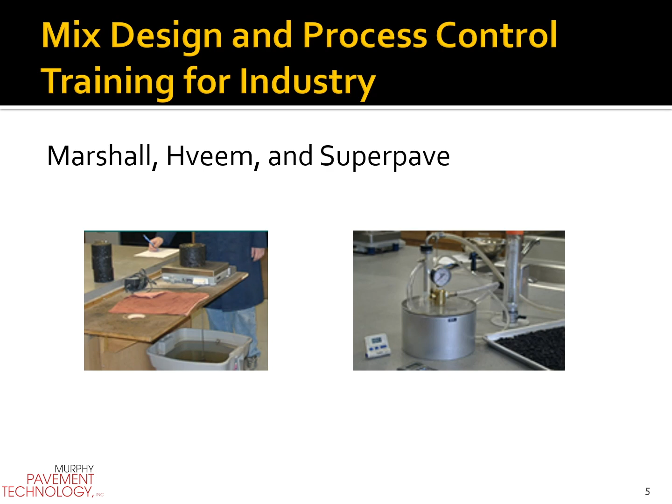Many different asphalt mix design and process control efforts exist, varying across the nation. However, we need to make sure we follow the practice that exists in the state you're working in, and the best resource available is the Asphalt Institute's Asphalt Mix Design Methods, known as Manual Series number 2.

So if you want the full book, reach out to the Asphalt Institute, or just make sure you hire a producer who uses MS2 as their design guide.

A lot of different products go into asphalt. It's a big world we live in, so we need to choose and select products that will perform for this application. In many cases it's similar to roadways and runways, however specific to impurities and things like that, it's different.

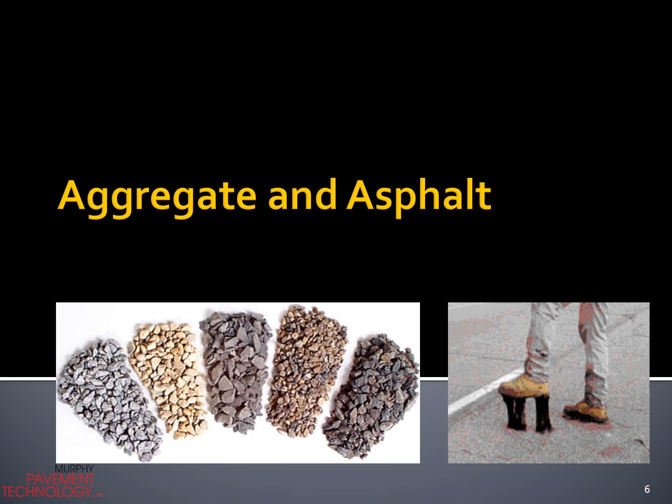Crushed particles are good for nearly every asphalt installation, and athletic is no different. Proper liquid asphalt is equally important - we need it to be soft and pliable, but tough with tenacity as well. Importantly, we need to produce good mixture properties and do quality construction of the density in place. We'll talk about those throughout.

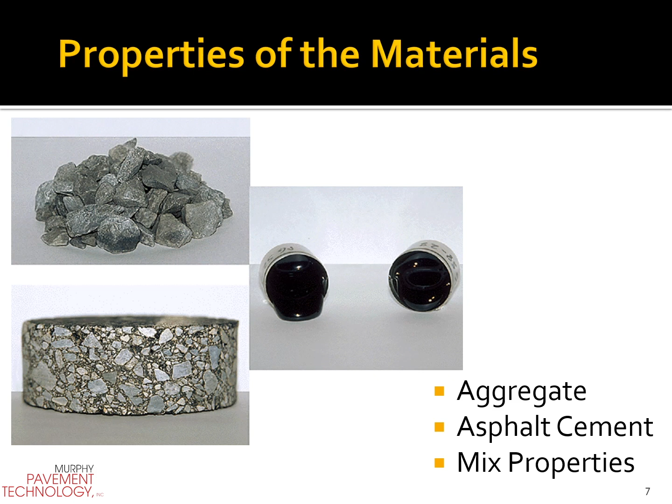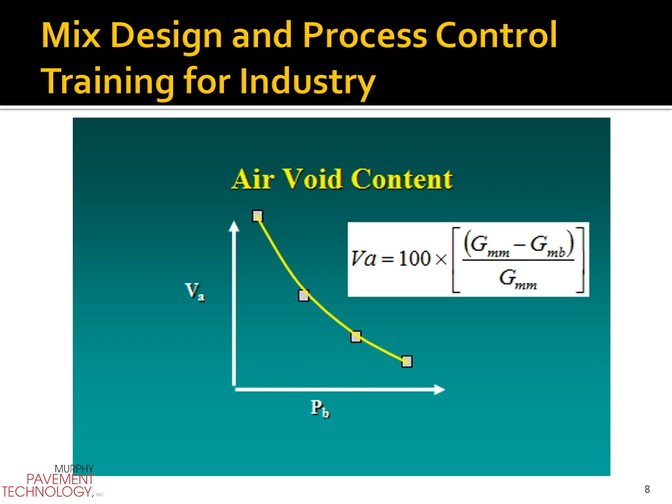A fairly standard and important item to be aware of is the proper selection of air voids. For our work in athletic, we're always going to choose air voids in the laboratory between 3 and 3.5% air voids. We don't want to be higher and we don't want to be lower - that should be our target air voids, plus or minus.

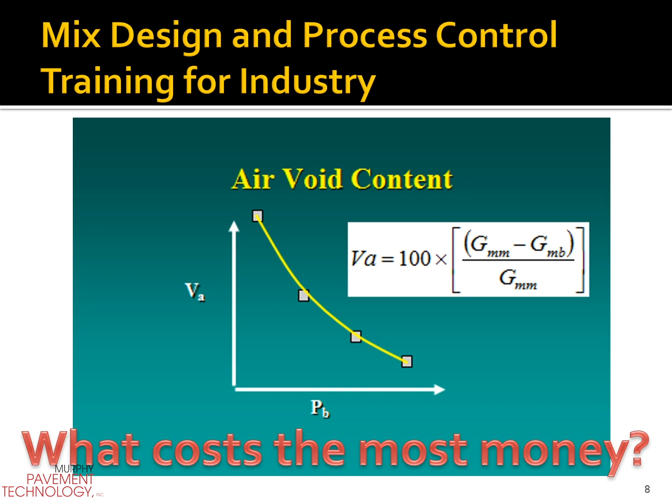The plus or minus will be very tiny, and dropping air voids to a lower level will cost money because it requires a little more asphalt cement. But that's okay, because for our application we need higher density and a mixture that'll perform better.

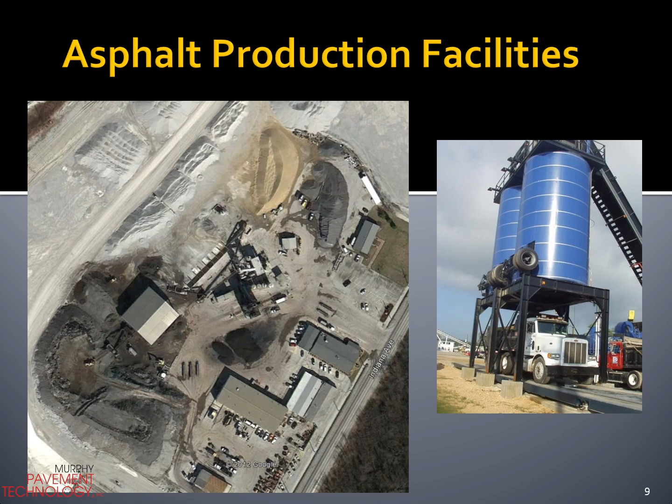There are lots of asphalt facilities around the nation. I recommend you reach out to producers who are National Asphalt Pavement Association members, or members of local asphalt pavement associations or the Associated General Contractors in the states or provinces around North America. They do a really good job educating suppliers so they produce the highest quality product possible.

So most should probably compact between 94 and 95% theoretical for athletic applications, not only on the mat, but on the joints as well.

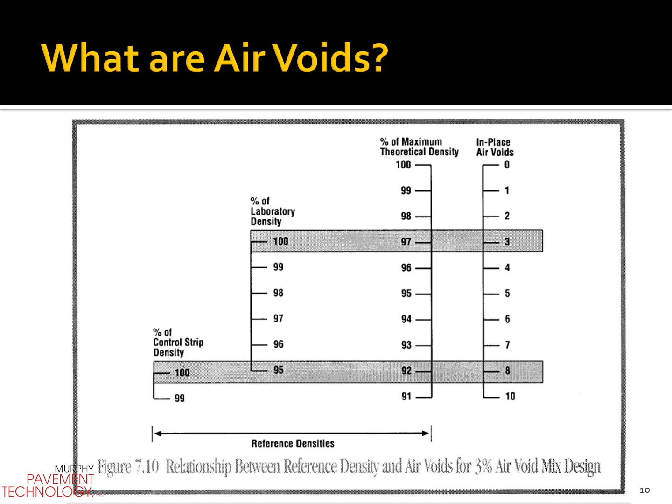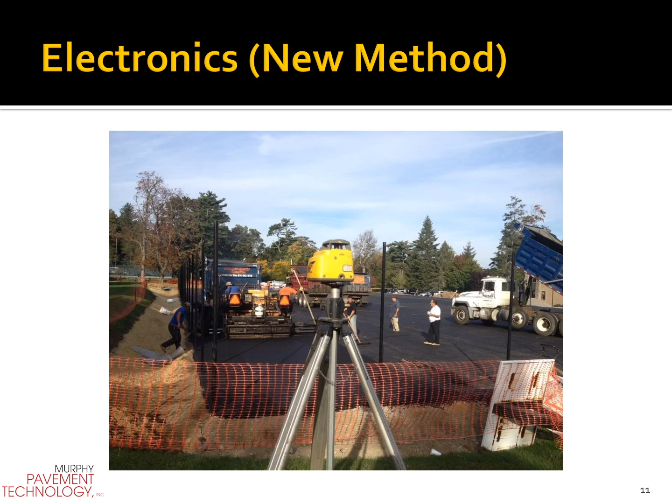For installation, we have lots of GPS systems available that can control our elevation and cross slope. Excellent pieces of equipment - these should be used.

You'll be checking the elevation as you go along. Again, very important for planarity, and very important for building to the proper grade and cross slope.

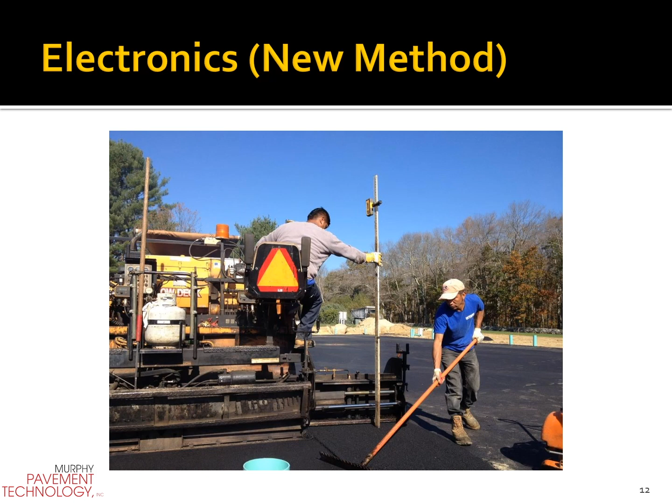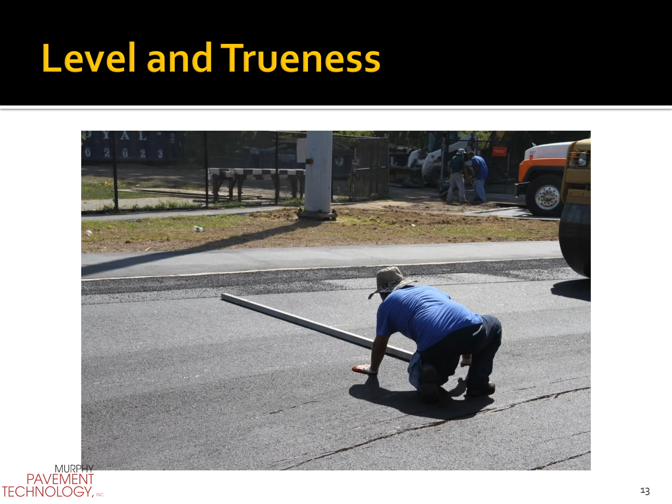Then there's going to be hand and foot inspection, checking for levelness and trueness after the rollers are on the mat. You have to do that across the mat as well as between the joints you're paving.

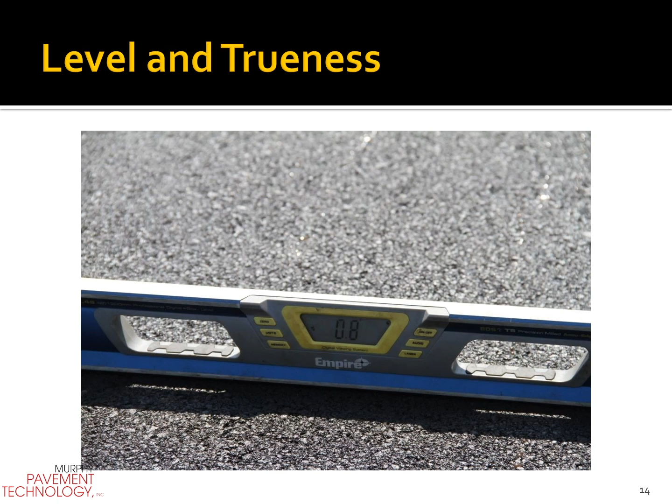It's just the worker's tool. They're targeting 1% cross slope - this one here looks like 0.8, so they're relatively close. They really want to pay attention because they have to make the water run off the court or the running track.

A real important item: when you're an installer of asphalt, make sure the architect has given you an adequate minimum lift thickness to do your job. That means you can get better planarity and better density, but in no certain circumstances should you place less than 3 times the maximum aggregate size.

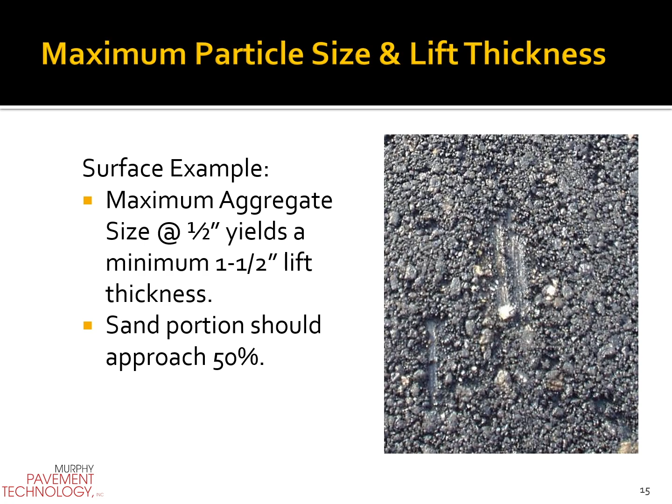Certainly the specification should be at least 3 times maximum aggregate size. Anything less is going to cause us to crush aggregate particles, which will lead to premature failures. And the sand proportion of your mixtures should be what we call fine graded, so they probably should approach about 50% of the mixture.

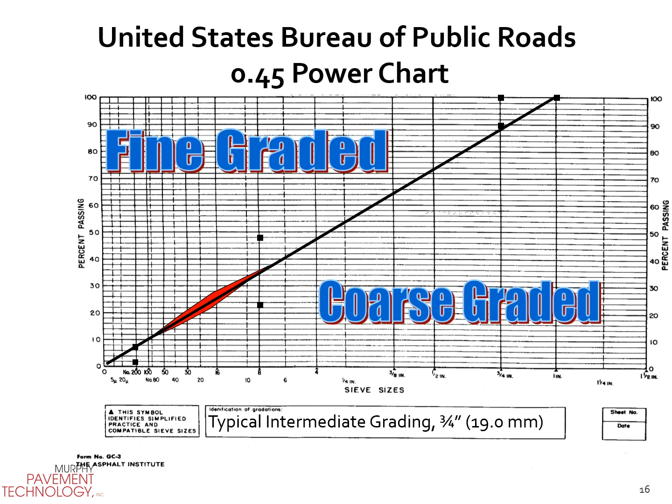We have different types of asphalt all over the nation in North America. Some are called fine graded, others are called coarse graded. I'm going to recommend that you look at fine graded mixtures in the area that you work because they're going to be the most conducive to the athletic asphalt requirements and guidelines provided by the American Sports Builders Association, and they really will lead us to a very exceptional finished product.

This is a lower course mixture. It would apply equally as important, if not more important, to the surface course mixture, or as you might call it, the top coat.

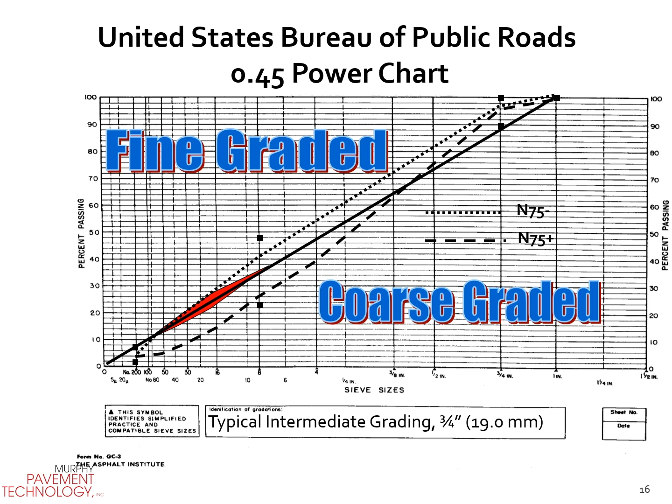Mixture properties will also guide the ability to get density. Again, a finer graded mix with a little more oil will probably compact much quicker and to the higher levels that we're looking for in athletic asphalt. So again, that's going to be a great reason why we should specify fine graded mixtures.

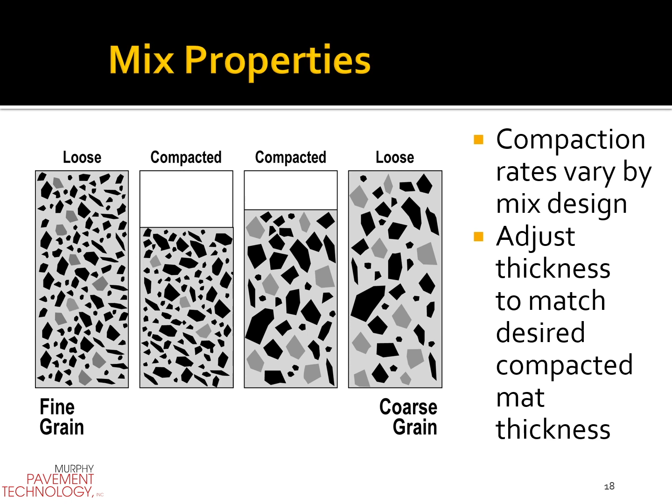That's just a picture showing different maximum particle sizes, to one more time remind you that asphalt producers have many different mixtures available. You just need to make sure that you get the proper mixture for the day of construction.

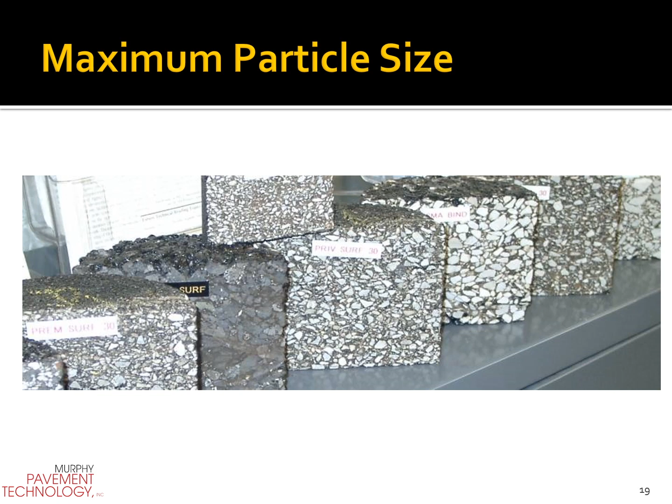I've developed nationwide guidelines and specifications for people to use in general. They just come down to fine graded, slightly higher asphalt content, and a higher compaction requirement that's required for, as we call, density. It's athletic as well as my commercial and industrial specification.

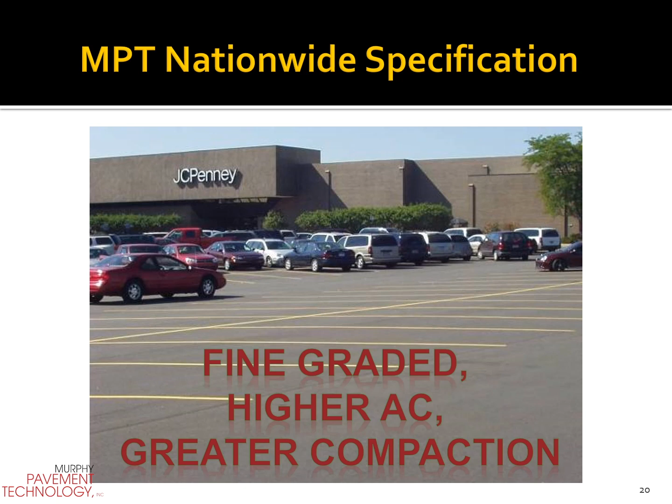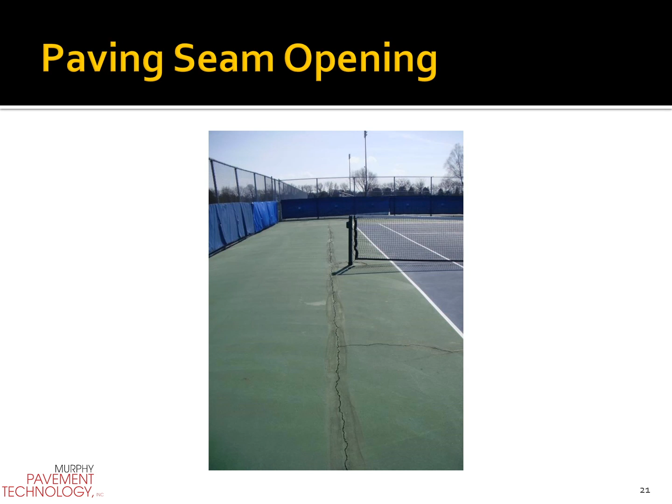A better way to do the laydown seam is to be off the court, or to use 2x4s to set the screed down upon and pull off of that. And certainly we could move this seam further away from the tennis court, so a narrower laydown mat, but the owner should be prepared to route and seal that as part of the original construction process so that something like this doesn't occur.

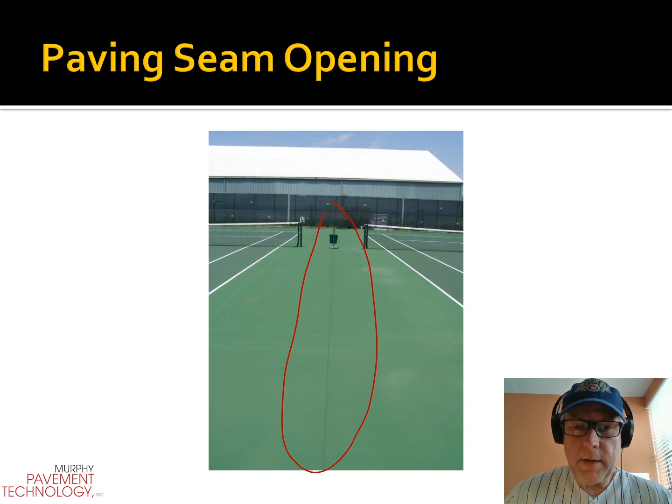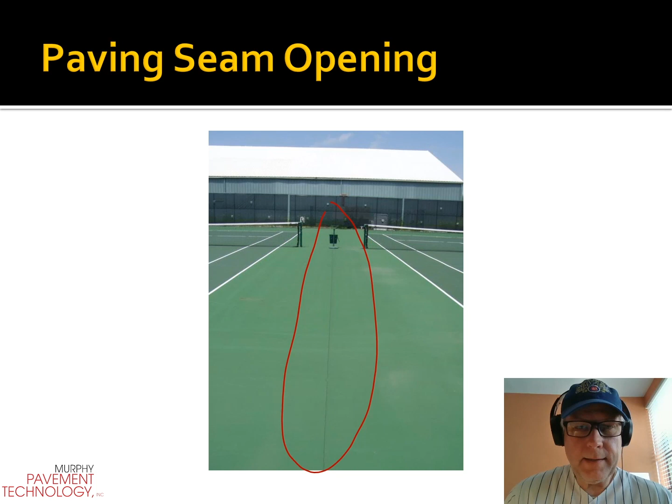This is a very classic example of a paving seam that is opening up in a relatively short amount of time. These can be avoided. However, if you are going to build paving seams, you can control the crack by sawing and sealing them. It's certainly a much more viable option than doing nothing.

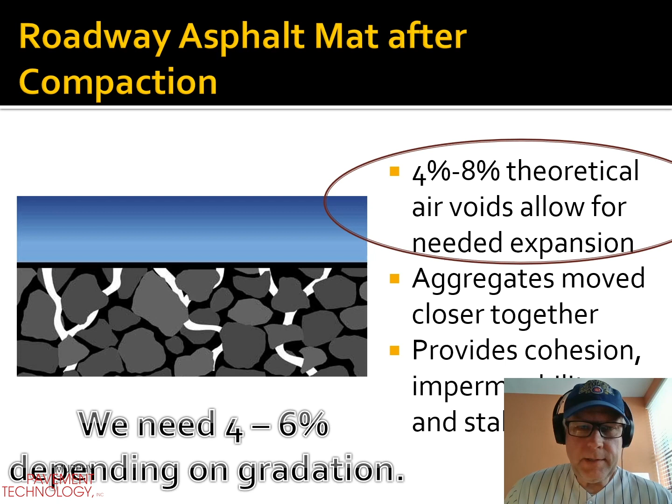Air voids are going to be reduced, and we don't want them to be, as we call, interconnected. They do provide for cohesion, keeping the product together, and it makes the asphalt what we call impermeable. If you have low density when you install asphalt, then you may end up with moisture stripping your asphalt apart.

So again, we need to have higher density. We have to reduce how much moisture goes into our mixture, and we need to ensure that the installation of the coating or the materials for running tracks will perform extremely high, but the asphalt has to be dry.

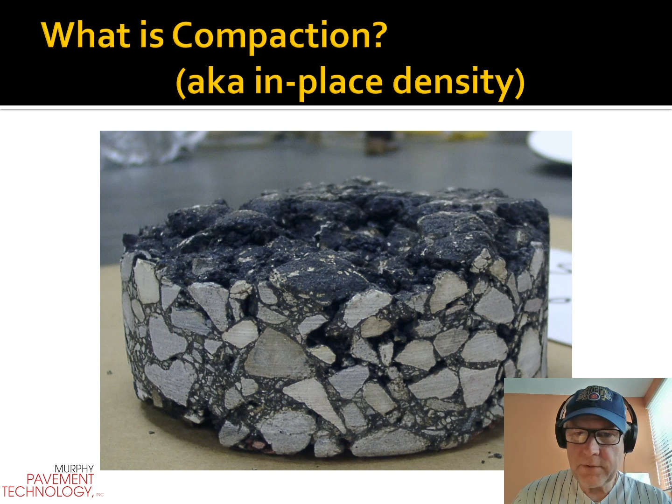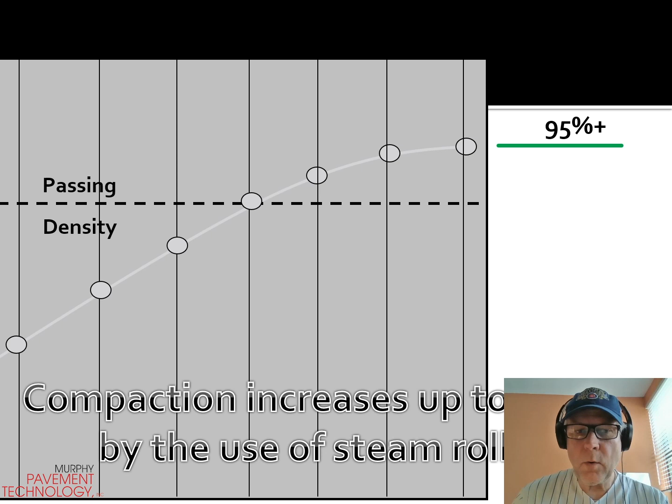We ensure and measure compaction in real time. You can cut cores, but most people will use either a nuclear or a non-nuclear density gauge. So we do roller passes to find out where we meet the density, and then we must stick to that minimum number of rolling passes.

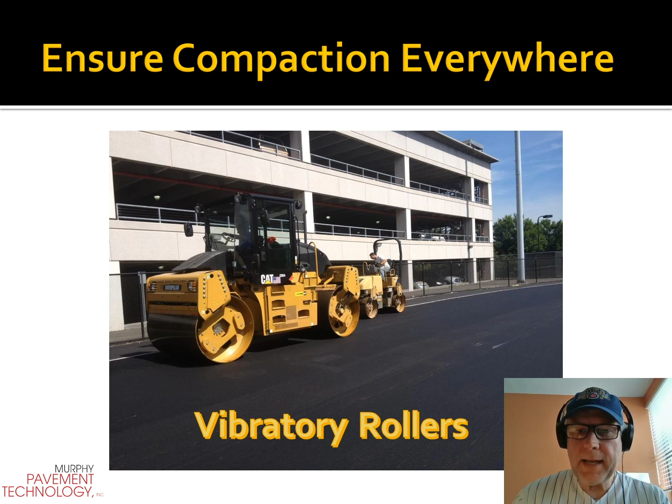These are just some pieces of equipment in general. I'd like to say everyone needs vibratory rollers. They need to be wider and bigger than is typically used by contractors, but we have to build really high density. In order to qualify that, we have to have a density technician on the site full-time.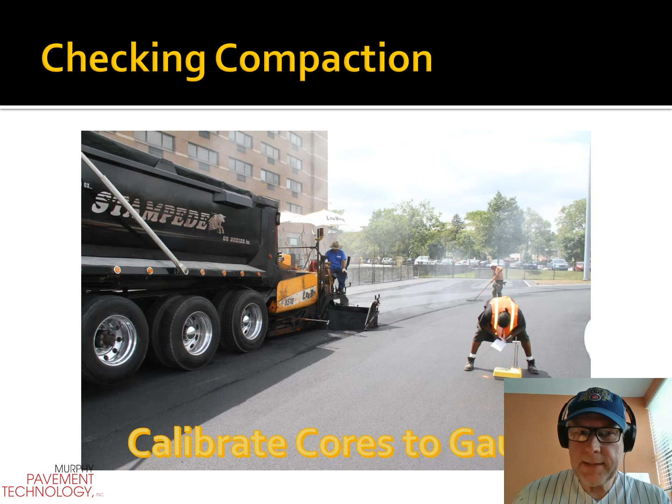Here's an example of a density technician doing a great job working with the contractor, checking compaction real time, working with the crew to ensure the asphalt's hot, proper ingredients, installed to the right thickness, smoothness, and density, and also checking on planarity.

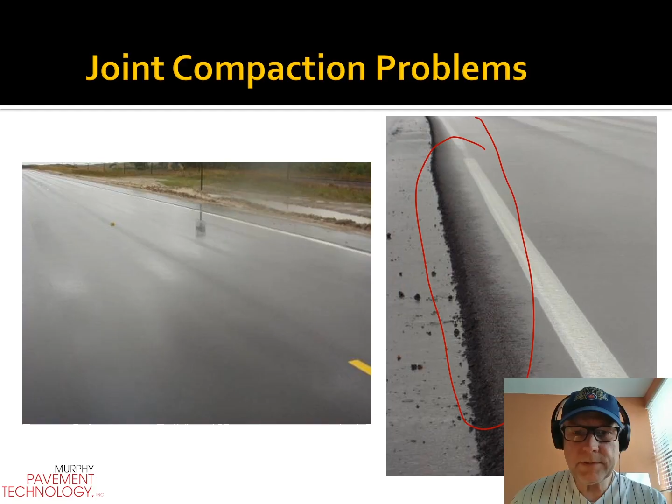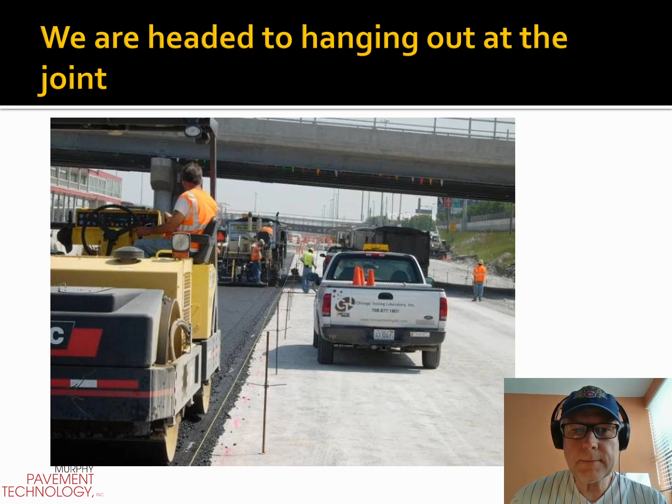So we essentially try to follow some simple instructions. So far I've talked about the importance of compaction of the mat and the compaction of the joint, and using the proper ingredients of asphalt to be successful.

It's just a nice picture showing a roller and the paving crew working together. Make sure the paving seams are tightened up at 200 or maybe even 220 Fahrenheit and above. In most cases, this can be accomplished.

The contractor just has to pay attention to their paving train, how many trucks they order, and the speed that they work with in a day. It may require paving faster and using 2 rollers in order to accomplish this. This is a job by job decision by the contractor.

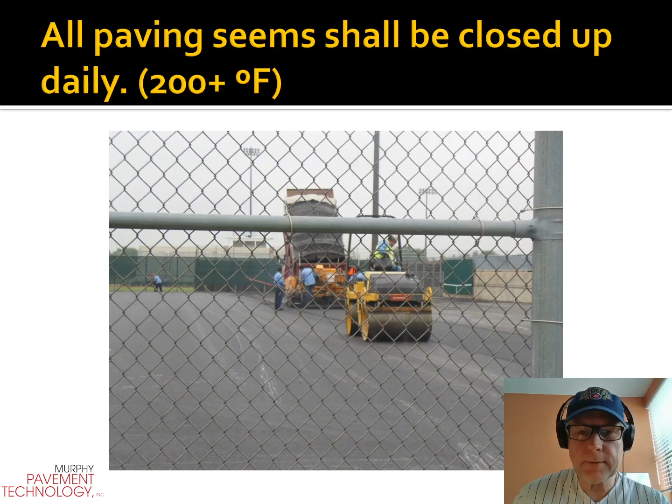Some other problem areas that I'd like to explore with you: coarse and segregated material. Early on, I talked to you about the importance of using a finer graded mixture. That will significantly reduce the potential for coarse and segregated mixes that take on moisture and cause premature failure. This is for everything: athletic asphalt, roadways, runways, and commercial and industrial facilities as well.

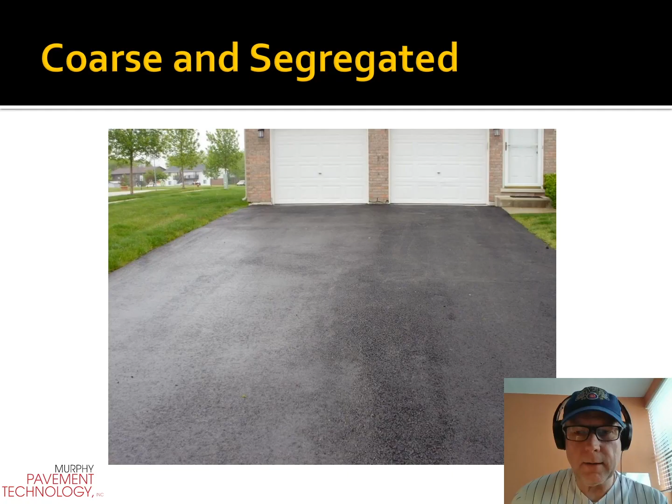Iron pyrite in coarse aggregate is one item that can cause rust spots. Steel slag is another one. We have to ensure that our asphalt doesn't include either one of these products. There are other products in the nation that cause rusting as well, and vendors need to know that those are unacceptable for use in the top course of asphalt for athletic applications.

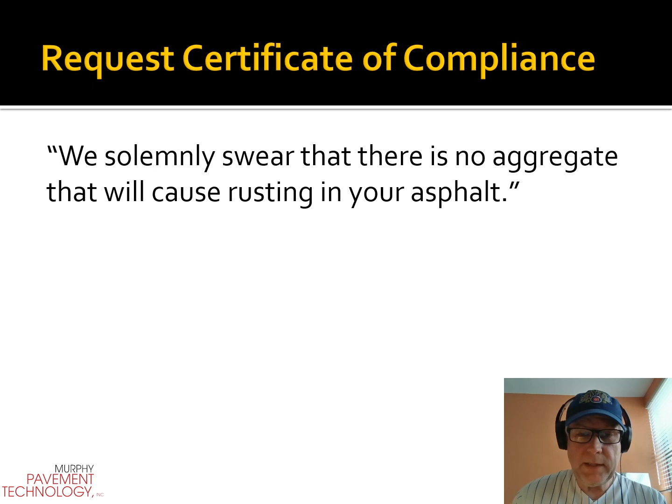I typically request that a certificate of compliance come along with your mix design that essentially says, hey, we paid attention to what you asked us, and we don't have rust-causing products in our material.

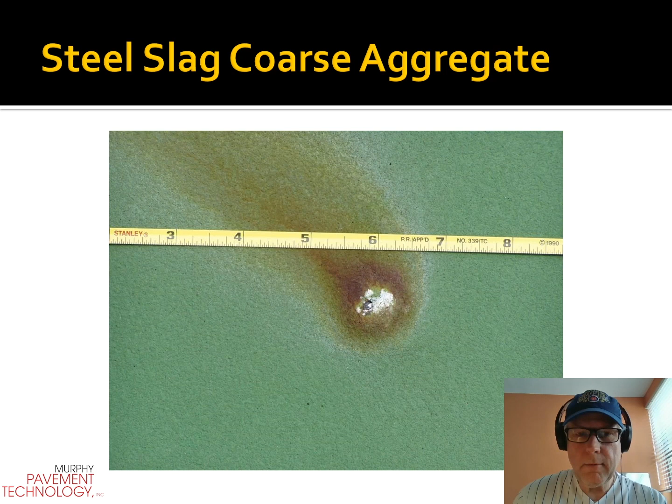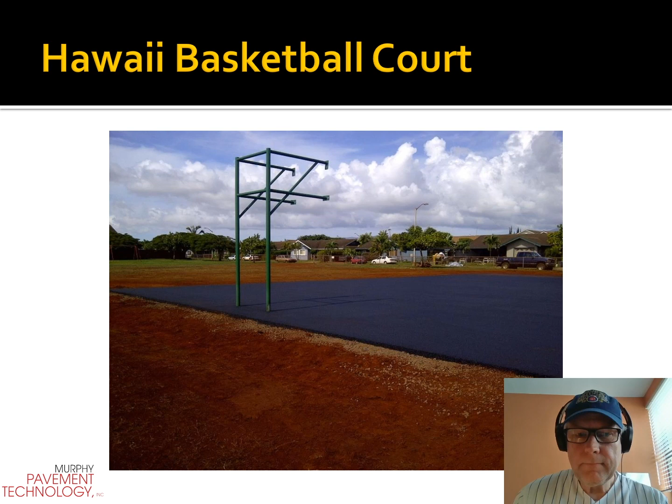Here's that court that's finished, different view, different location. There's multiple sites in Hawaii.

Here's something from the East Coast where you know that moisture and debris, the grit so to speak, of the embankment was getting onto the asphalt. And then cleaning it incredibly well before coating is going to be a very important task—sometimes not always done perfectly.

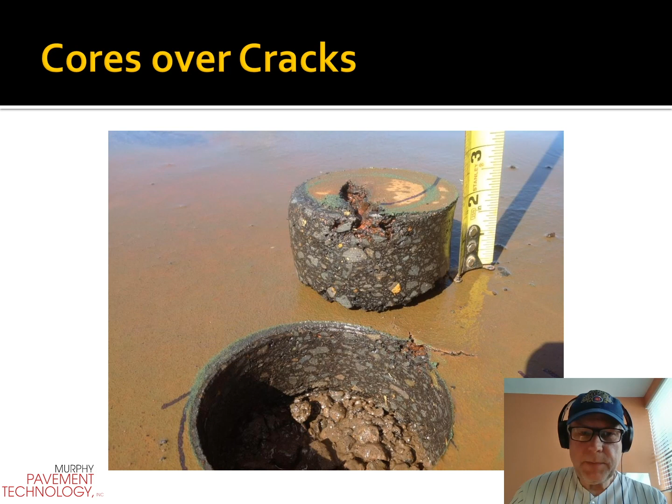Autopsy and forensic work, I should say, includes cutting cores over areas that began to crack and delaminate. Primarily it just became an issue where contaminants still existed.

A lot of this happened in different states. This one is Hawaii, where they used a highway mix instead of a low volume mix. They had very high air voids. When less than 3% is appropriate, they had a tiny product known as dust, or minus 200, which is really high, with very highly absorptive aggregates. They ended up with an optimum asphalt over 7%, but it actually required more because of how absorptive the products were.

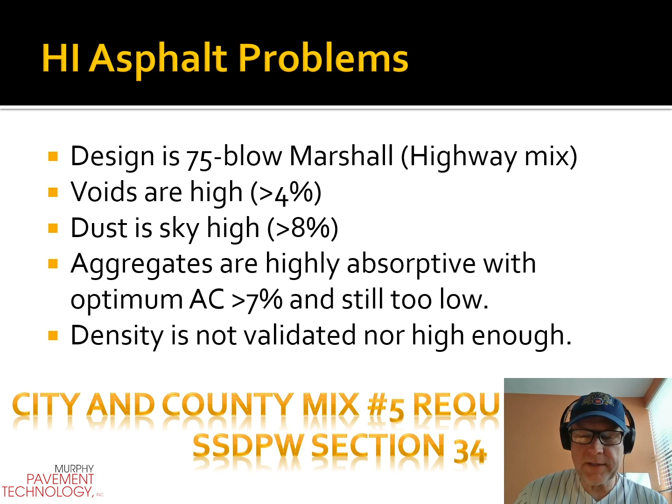Essentially, they used what we call a city or county mix when they really should have used something much finer, with higher asphalt content and much higher density. So if any dirt gets onto the top of the asphalt and then moisture penetrates into the asphalt, now you have not only moisture, but dust and dirt as well.

All of those are imperfections that will cause your coating to fail. Block cracking is when asphalt's too hard, usually with a real high amount of dust. Hard asphalt, we need to use a softer binder, low in-place density, and a reduction in film thickness. Sometimes people use an excessive amount of recycled materials into the asphalt, which, if not properly designed for, can dry the mix out, harden the asphalt, and provide a lot of minus 200 or dust, which again stiffens the asphalt. So get a good design first.

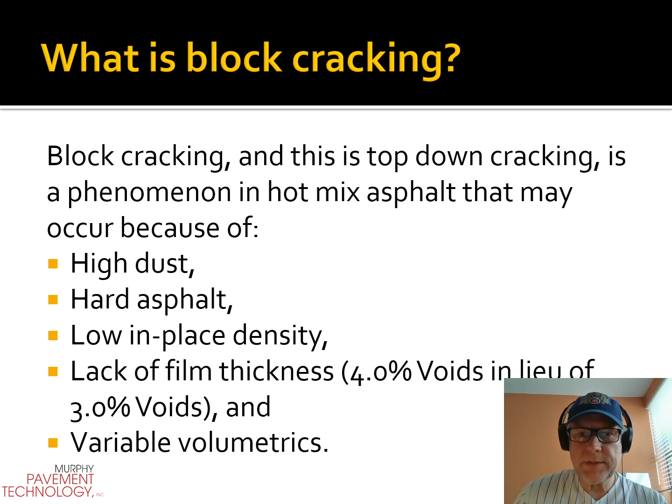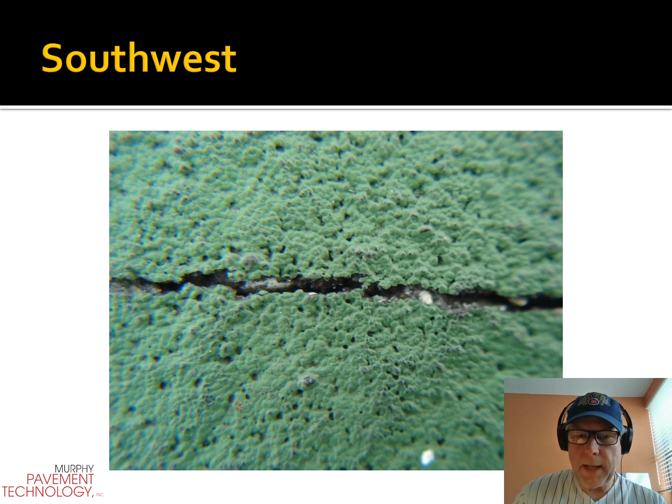Just some pictures to let you know. Again, in the Southwest, they used a roadway mix, not a low volume mix. They used hard asphalt, high air voids, and poor density. No quality control existed. So by now you've picked up on a common theme of how asphalt can be designed and installed improperly for this application of athletic asphalt.

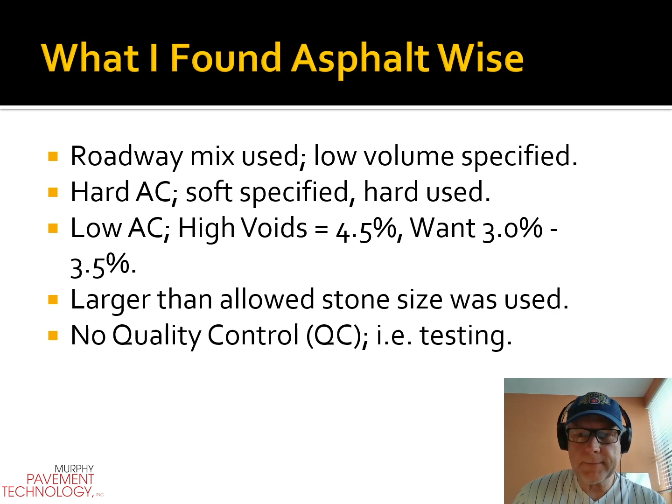I was involved in the slip sheet project. That's where you install a single size coarse aggregate over existing asphalt and build new high quality asphalt on top. It's somewhere in the Midwest. It had the same outcome, except it got even more complicated.

The forensics actually dug into the foundation and found that the slip sheet was adequately specified, but the product installed was not what was specified. It ended up being rubble with a high amount of minus 200s and clay. It became very stiff, and when moisture got in, it cracked.

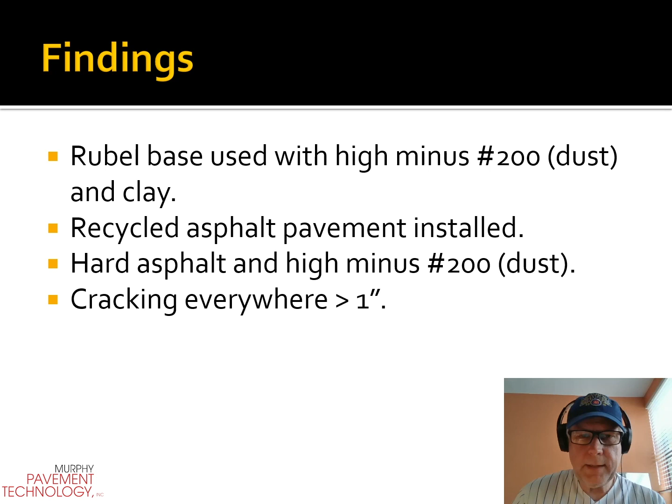The cracking of the foundation actually reflected through the asphalt. The asphalt wasn't the greatest either. It had a really high amount of recycle, very high dust, and poor density. So a lot of things went wrong on this project. It was a good design, but the execution on it just was not proper.

I'll show you shortly, but essentially what we call them are hairline cracks or check cracking. In the Canadian case, again, similar: a roadway mix was used, hard asphalt, very high air voids, poor density, no quality control. The extra phenomenon that caused problems was it was paved in cold weather, and then it was coated in the spring, while there was still moisture in the mixture, which caused rapid deterioration of the coating.

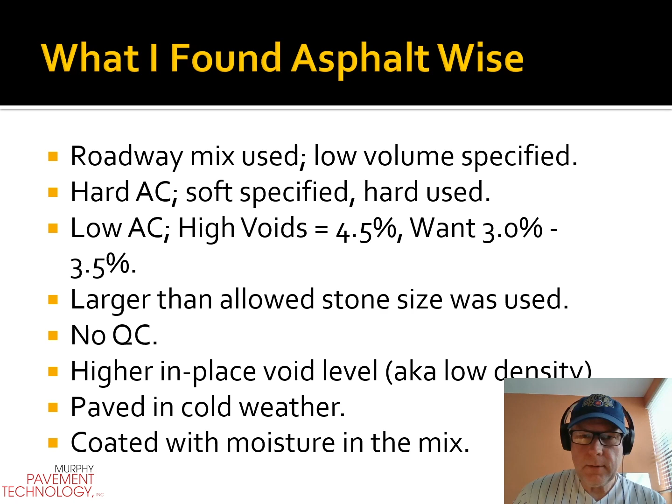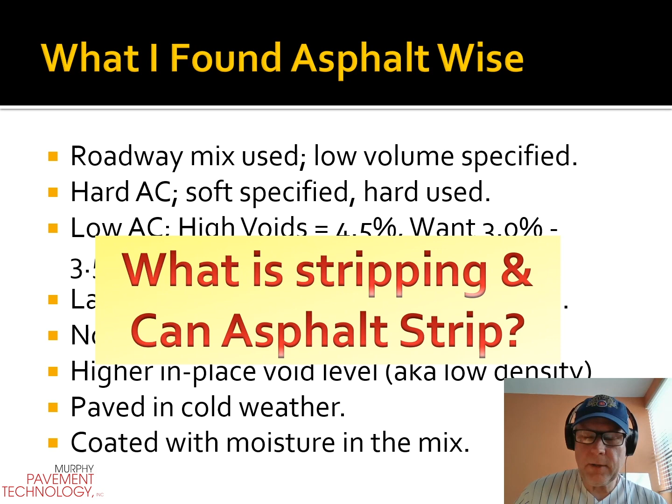It also allows for what we call stripping. That's when the asphalt pulls away from the aggregate, and essentially the asphalt begins to disintegrate in place, and it will not last 20 years as expected. This is really a phenomenon we can address with higher oil contents and higher compaction values.

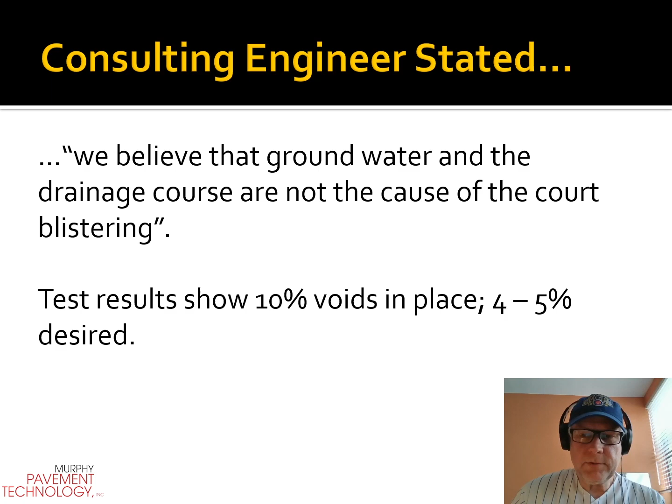A consulting engineer stated that they thought it was groundwater that caused it, but the test results showed there was 10% in-place air voids in the asphalt, when 4 to 5% is desired. Trouble will begin if it goes above 8% air voids, so you probably want to target no more than 7%. Average should be 5 to 6% air voids.

This is when moisture gets trapped in the mixture. It actually will fracture the asphalt about an eighth to a quarter inch below the coating, because moisture is trapped. In the summertime, the moisture expands, and the expansion into steam develops a pounds-per-square-inch pressure that is stronger than the asphalt binder. It will no longer hold together, and then it rips apart. Many people think it's the coatings causing the problems, but the reality in most cases is it's moisture in the asphalt.

Cold temperature paving of asphalt is not a friend to any application, and certainly not a friend to athletic asphalt either.

I told you I would be showing you some photos of check cracking, and you can see all those tiny cracks going across the asphalt. So now there's tens of thousands of little areas where moisture can get into the asphalt and get trapped. Check cracking cannot be amended. Check cracking will almost always guarantee you a failure, whether it's on a roadway, a runway, commercial industrial parking lot, and certainly athletic asphalt as well.

Do pay attention to the temperature. That's why we have criteria that typically are 45 or 50 degrees Fahrenheit and rising for the installation of surface courses. I strongly recommend you enforce that.

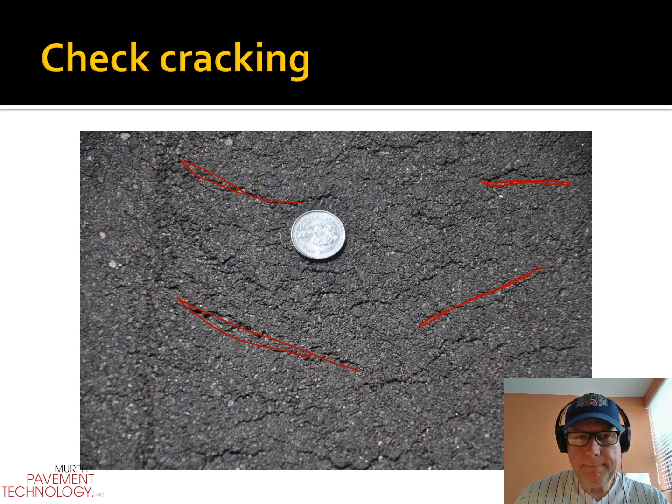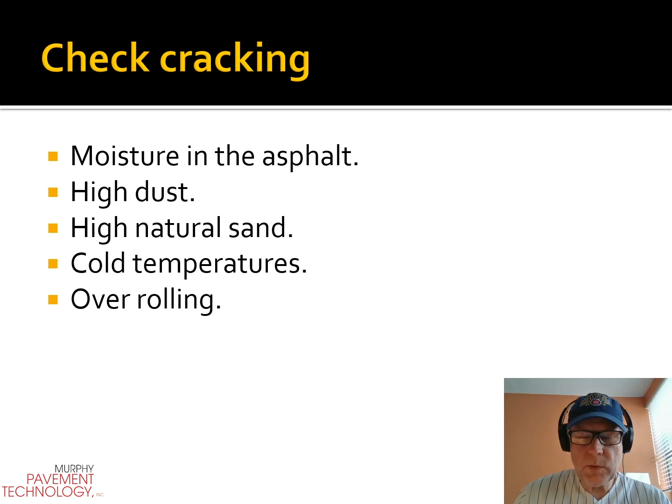Check cracking will lead to moisture in the mix. Sometimes it's excessive sands and dusts, but it's almost always related to cold temperatures, and occasionally it can be related to overrolling of the asphalt as well. So a good QC technician and a foreman is going to pay attention to what's happening behind the finished roller on asphalt projects.

Avoid ponding at almost any cost. However, I do know ponding occasionally occurs, and then levelers have to be installed. Work with the coating manufacturer to use the correct leveler, and absolutely pay attention to the maximum thickness you can place it—almost all are limited to an eighth of an inch. Some have tried to install them a quarter or greater in one lift, and then the skinning on the top captures the moisture in the product below, and then we end up with what is known as mud cracking.

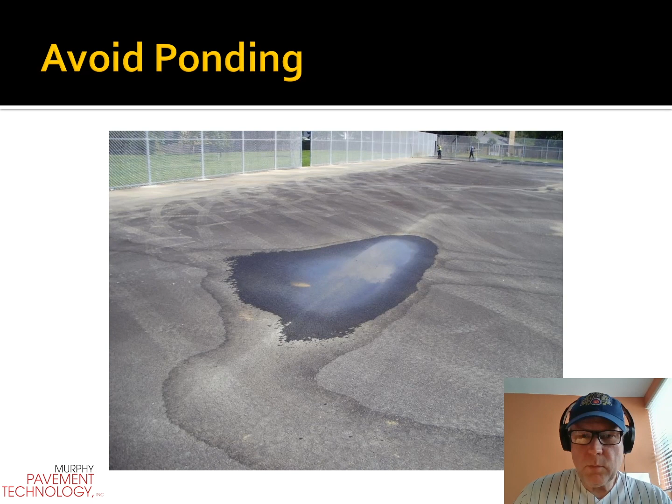Here's a contaminant that's on the project—most likely diesel, although it could be drained down. It's most likely diesel that will cause a failure of the surface coating, and it'll happen fairly quickly as well. Document the asphalt once it's installed with pictures.

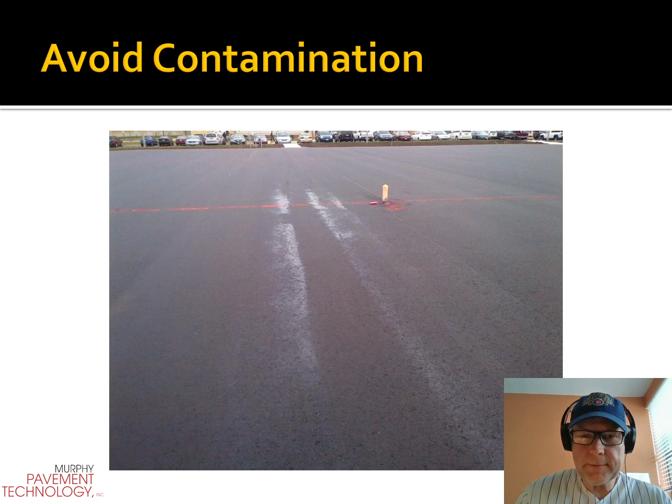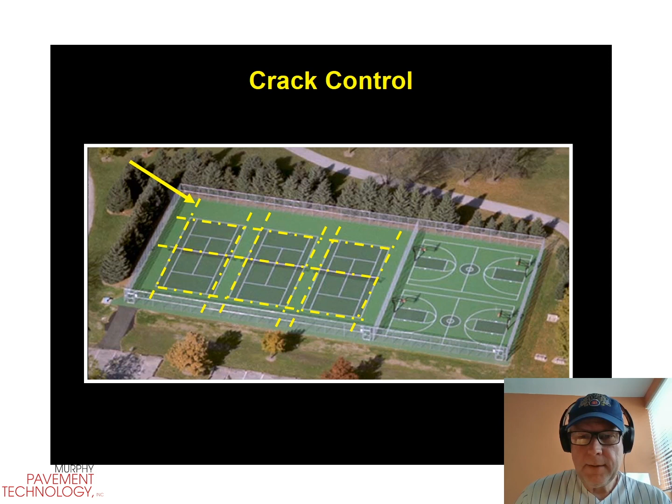Sometimes you can do crack controls. This might be overzealous—most of the time I recommend underneath the net, and then one saw cut between the courts; this has multiple ones. This is just a picture talking about crack control. Just understand the value is that you can force the cracks to occur where you want them to, and then you just need to protect them so they don't fail prematurely.

It's just a typical standard I've come across. You will pay attention to the thickness of the asphalt, usually saw cutting to a depth of two-thirds of the total asphalt. Then you're going to put some type of sealant material in at the top so moisture doesn't go in. Again, the manufacturers of the coatings are going to give you really good guidance on how to actually perform this. It's going to be a straight and true line, with a good quality saw. Then we need to make sure it's dry and install the proper sealant material, again as directed per your coating manufacturer's recommendations.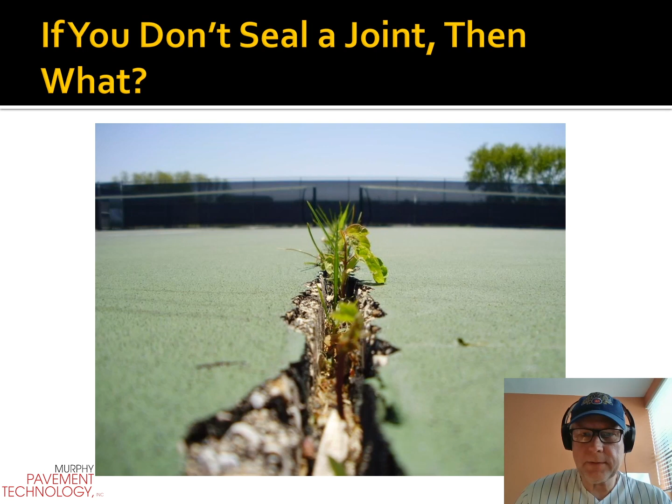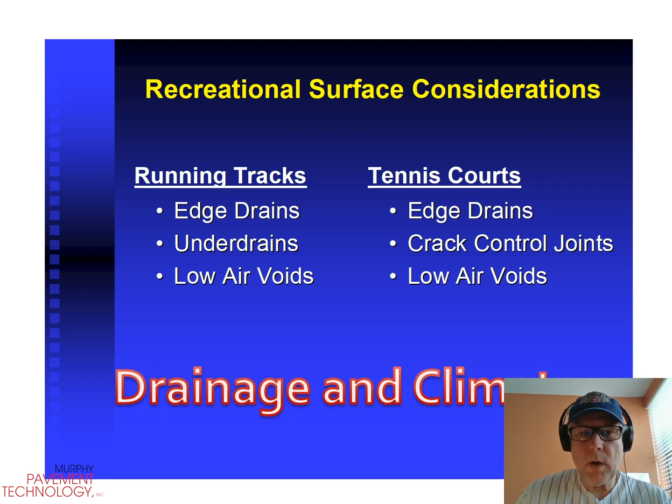The devil's in the details. Again, whether it's a running track or tennis courts, we need to have edge drains. We need to pay attention to water from underneath. We want mixtures that have low air voids and high density. You have to pay attention to your climate and use the proper liquid asphalt specified for your climate. And you need to use coarse and fine aggregate ingredients that are very high quality so that they don't leave rust marks on your finished product.

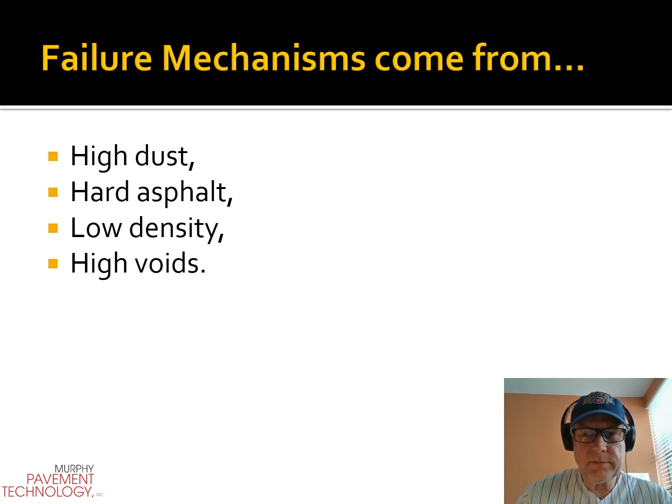So, some summaries again: failure mechanisms, high dust, hard asphalt, low density or poor compaction, and high laboratory air voids. They're all telltale signs of what I typically find when doing forensic work on behalf of people who are challenged with premature failures. Low asphalt content's a relatively frequent theme as well, and most clients are minimizing how much recycle is actually used. There's nothing wrong with that, there's just a cost to it. Many of my clients will specify mixes with no recycle in the surface courses. Those are their choices.

All of the other items can cause premature cracking. Premature cracking leads to moisture. Moisture leads to failure.

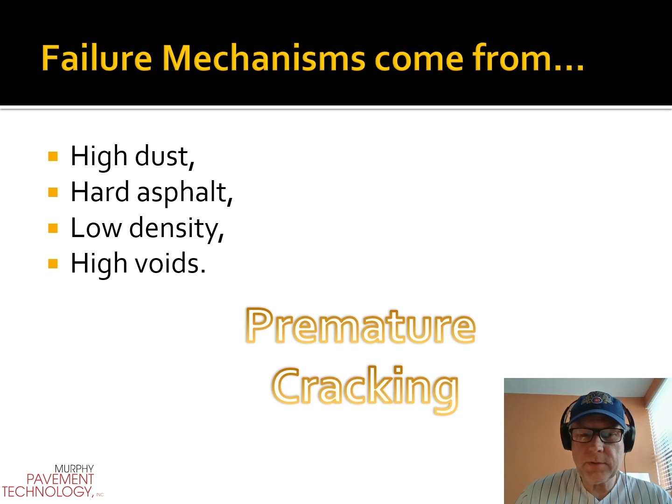So what do you really need? You need a low volume mix. You need to reduce air void content. Use a softer asphalt. Specify a half inch maximum particle size for your surface course. Use a minimum of 45% sand. Crushed is preferred. And then specify DOT coarse aggregate specifications. Eliminate soft and unsound material, and do not use anything that rusts.

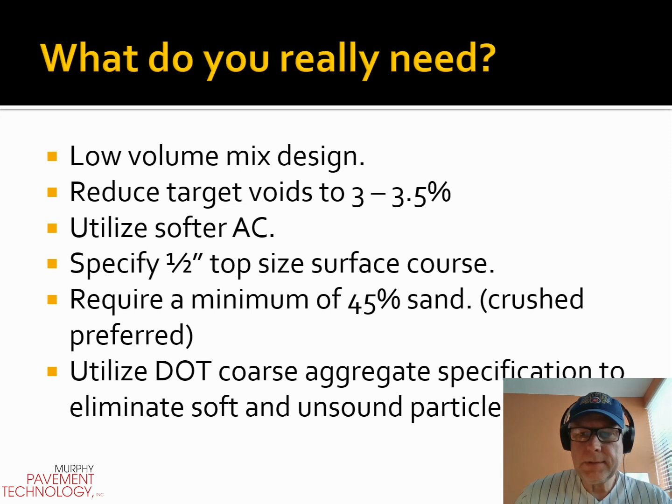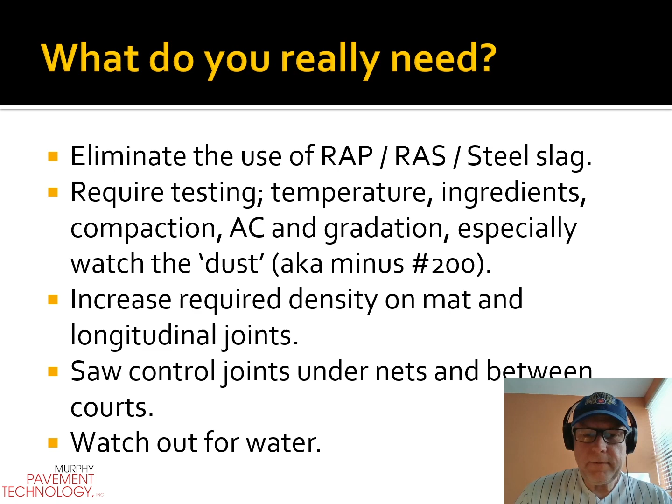Eliminate the use of RAP, shingles, and steel slag on surface courses in particular. Require testing, quality control, and quality assurance both. Temperature, what are the ingredients, asphalt content and gradation. Watch the 200, and definitely have a density technician checking the mat and joint densities in the field. Saw cut control joints under nets and between courts if you think it's appropriate, and watch out for water.

Drainage is crucial for nearly every application. A perfectly good facility is now being attacked in this photo due to lack of drainage from underneath. It's a case-by-case basis. Hire your geotechnical engineer to do a good analysis.

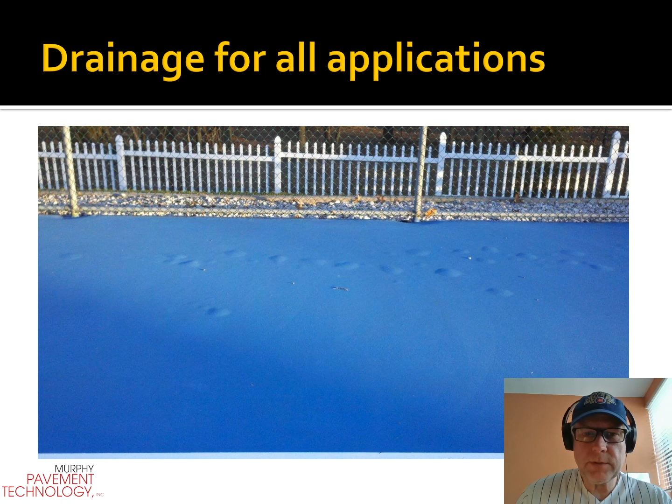For forensics with me, I get involved. I just need to know the year built, show me the cross-section, all the ingredients and materials, and then I'll just have at it in doing the review.

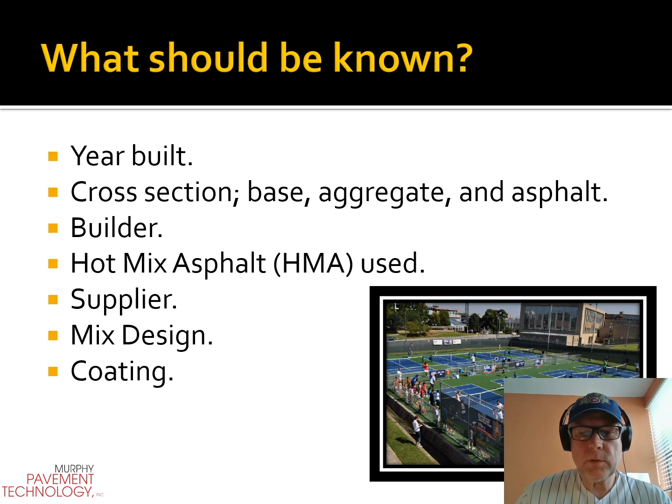These are things you should be able to do as well. You want a mix design that's signed. You want to make sure that the supplier of the asphalt is approved by the state agency or the province you're working in. And then coating manufacturers have to pay attention to time of year, the weather, if there's moisture in the mix, if they have to wait till the afternoon to do their work. A lot of things that they're experts at. Just need to kind of remind you to keep doing what you do well and pay attention to the details.

So I want you to be determined in achieving your goals. It takes teamwork.